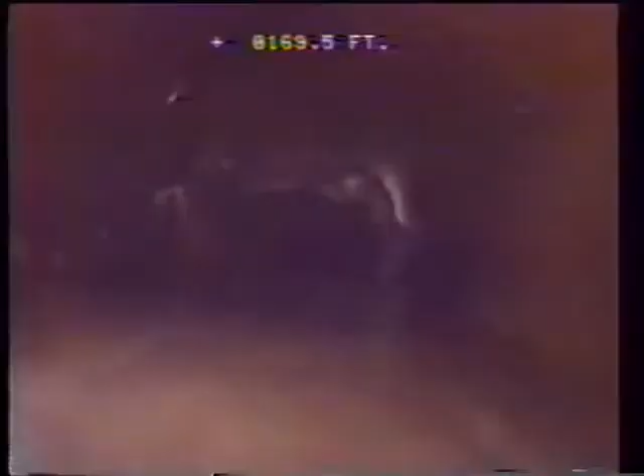Television has been growing in popularity as a means of investigating the condition of all types of buried sewer lines. As an investigative tool, it is unmatched. The advent of television inspection has enabled operators to pinpoint structural damage, corrosion, leaking joints, root penetration, illegal connections, and other problems often seen in older lines.

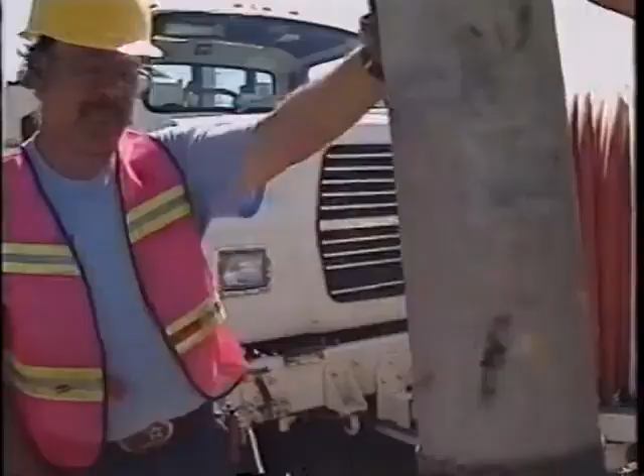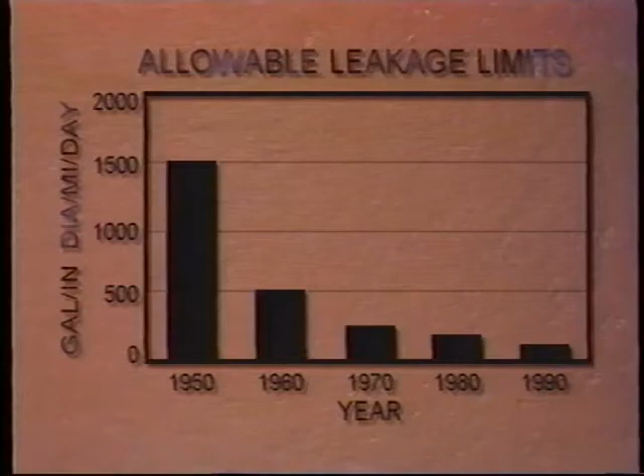Maintenance and rehabilitation of older systems has been made possible through the use of televised inspection. And as the older lines are brought up to today's standards, much of the credit is due to underground television surveys and to the fine work of the crews that do the evaluation.

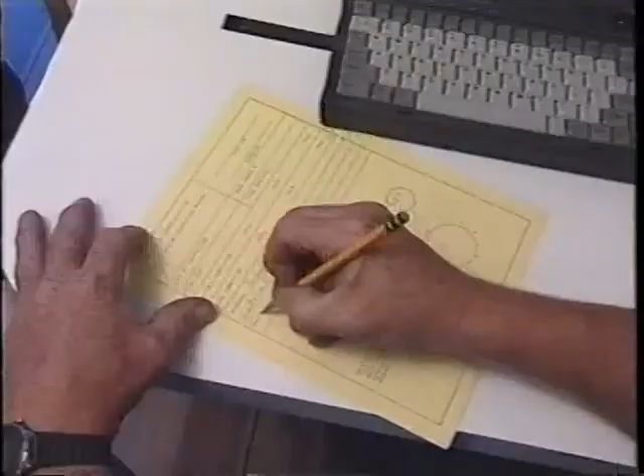More recently, however, a number of agencies are using television as a means of determining the acceptability of newly constructed lines. Opinions regarding structural damage are, in many instances, made erroneously. Operators of television equipment are looking for problems. This is the nature of their job.

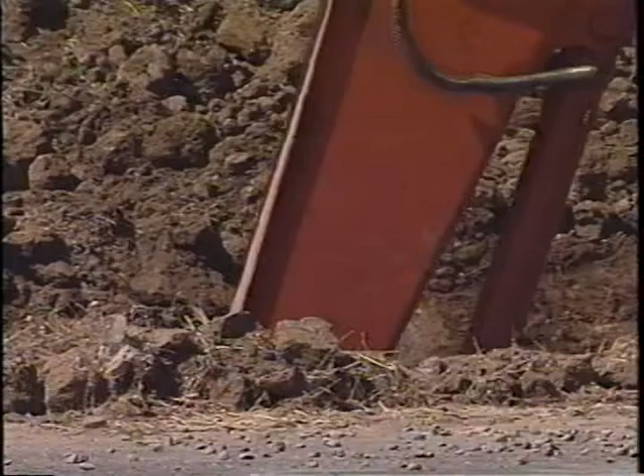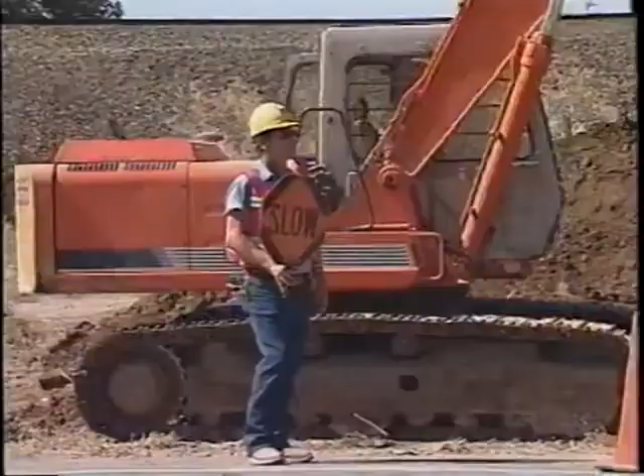However, there have been many instances where dig-ups have shown the problem described in the log to be either non-existent or of a significantly less magnitude than originally indicated. Unfortunately, when entered into the operator's log, these unintentional errors of judgment have frequently led to conclusions which become difficult to resolve. This practice has resulted in delay, extra cost, confusion, and in some cases, legal action.

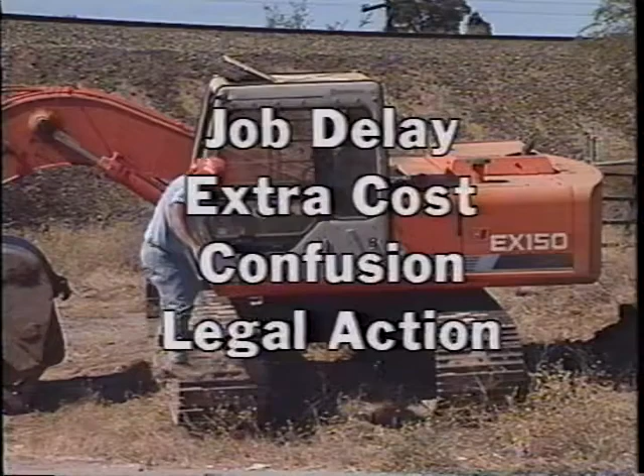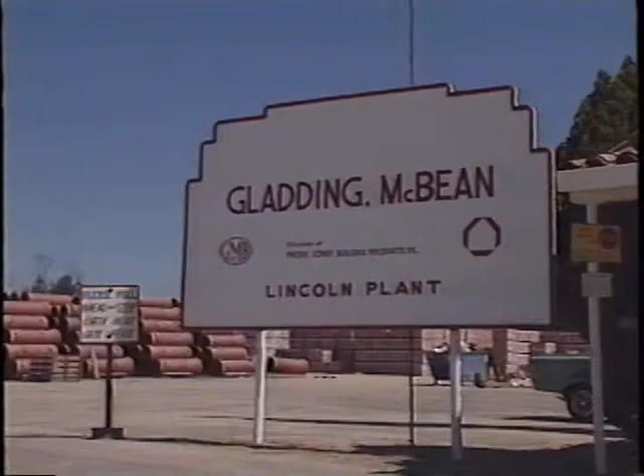To prevent unnecessary expense, delay, and possible litigation, the National Clay Pipe Institute and the National Association of Sewer Service Companies agreed to co-sponsor a project to explore these problems in greater detail. Recognizing the educational benefit that would come from the study, the CUES Corporation also agreed to participate. The evaluation would be done at the clay pipe manufacturing facility of Gladding McBean, located in Lincoln, California.

The goal of the project is to demonstrate and identify several factory and field conditions which can be erroneously interpreted during televised video inspection and assessment of new sewer lines. It is by no means all-inclusive, as many other conditions may be found in a sewer. The following three areas will be covered: 1. Sags in line. 2. Seeing is believing. Or is it? 3. Perceived defects.

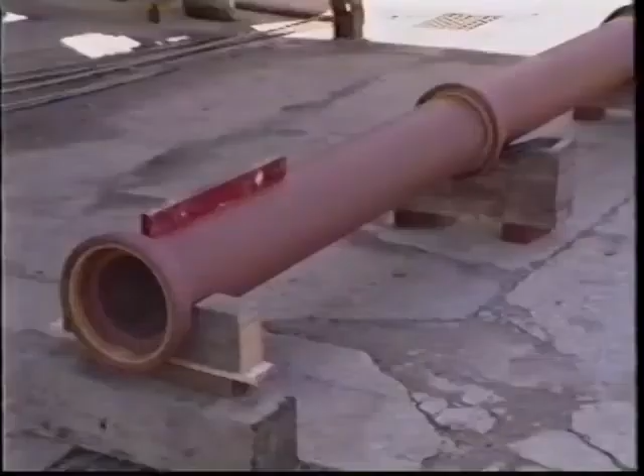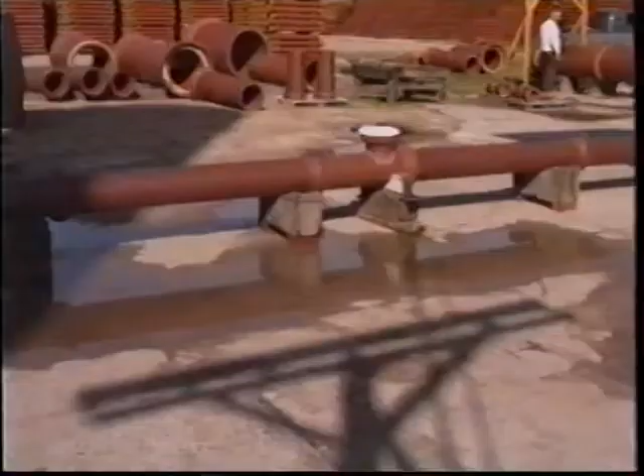Sags in line. The first test shows a simulated sag in an 8-inch clay pipeline. Although the amount of sag permitted in a pipeline is not specified in ASTM, it is common knowledge that all pipelines experience some settlement under load, and it is due to the pipe bedding rather than the pipe itself.

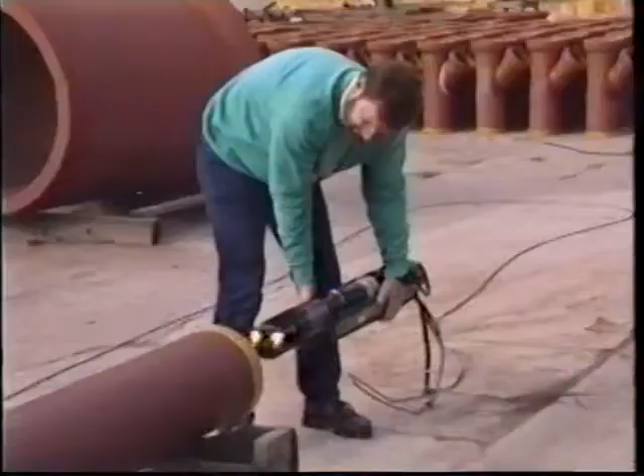It should also be noted that a televised inspection made shortly after a water exfiltration test can have the appearance of a sag due to the standing water, which may take a long time to drain from the line. This is especially true in a line with a very flat grade. Such lines have been erroneously declared to be leaking by an inexperienced operator.

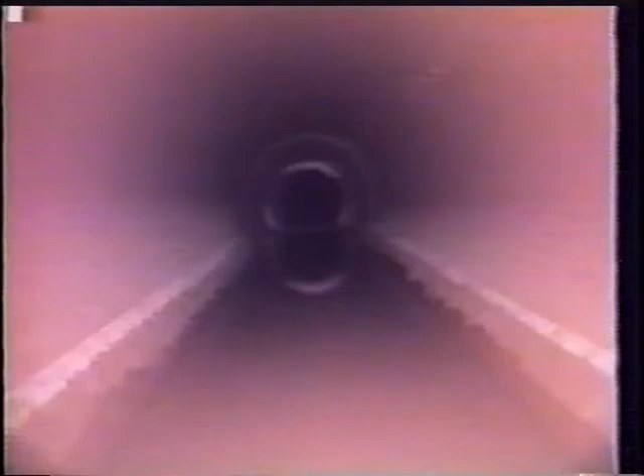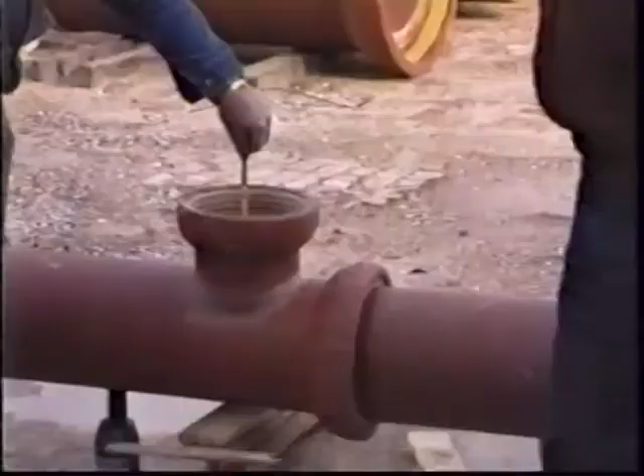Estimating the depth of water is very difficult. Can you estimate the depth of water in this pipe? Visually, there is no point of dimensional reference other than the pipe itself. Our measurement indicates the water depth to be 1 1/2 inches.

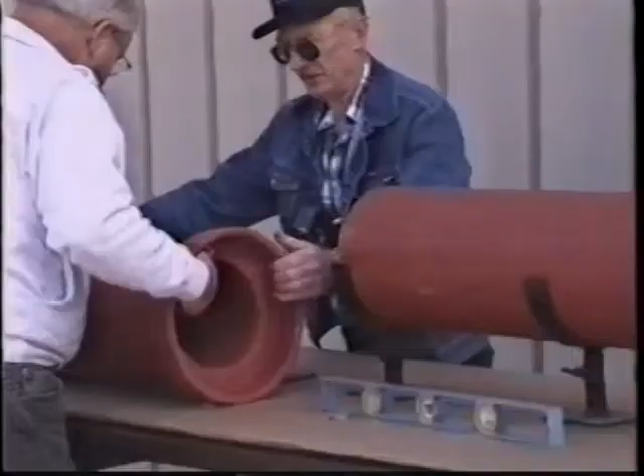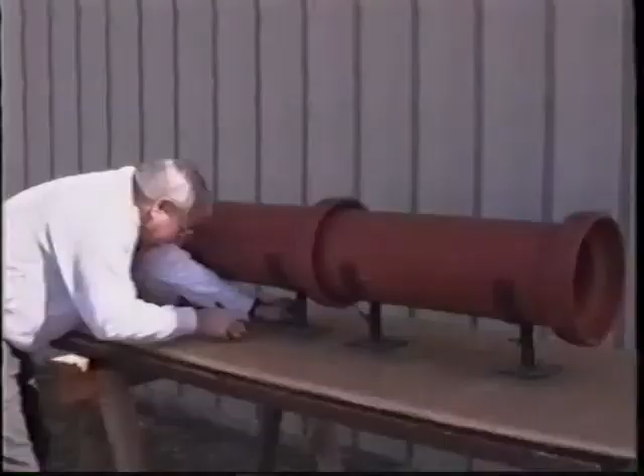Seeing is believing. Or is it? The next part of the evaluation was done in 2 short lengths of 8-inch vitrified clay pipe. The shorter lengths were selected for ease of setup and adjustment. The pipe were without gaskets of any kind to enable maximum joint movement.

A frequently observed field observation is sometimes referred to as a halo. It was believed to be caused by the camera light reflecting off the pipe, especially at the joint. This reflected light tends to exaggerate and distort the resulting image. Let's listen to an operator's comments.

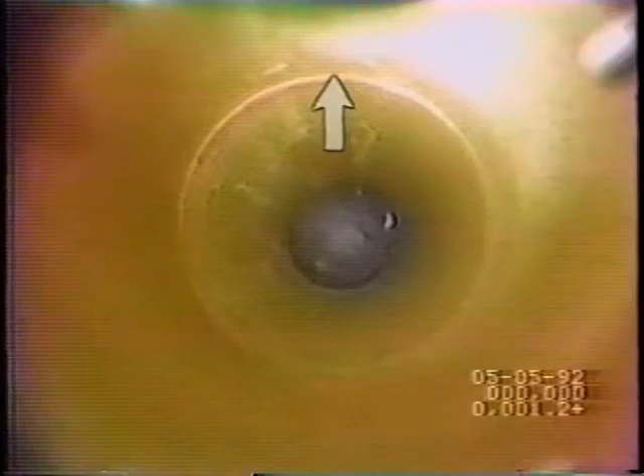What you're now viewing is a 1/4 inch. The upstream section of pipe has been raised a 1/4 of an inch higher than the downstream section. As we turn the iris up, you can see the top of the pipe. The offset that you would see would be in quadrant 3, which is the top of the pipe. You would not see anything on the bottom when the upstream section is raised.

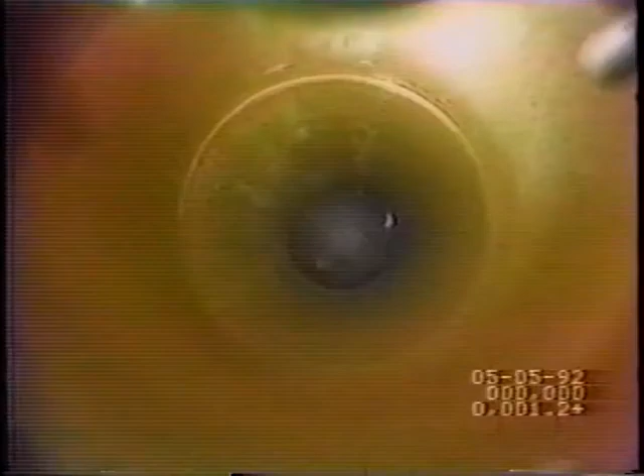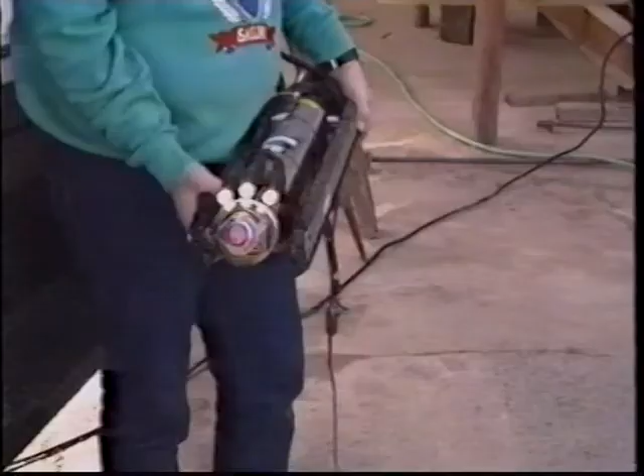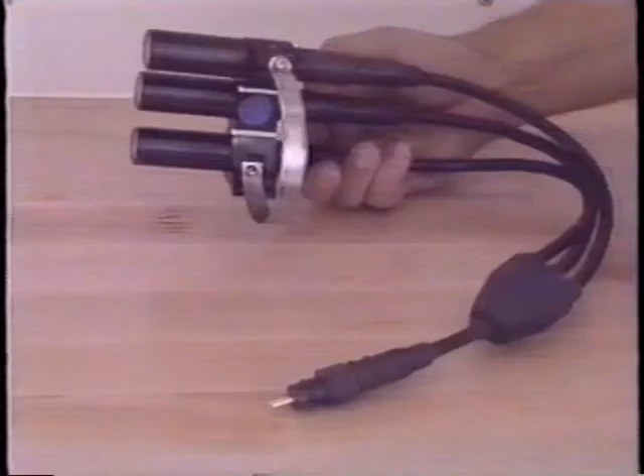The camera used by CUES at the Lincoln tests was a current model, which had automatic light and lens adjustment capability. This time, when the operator attempted to increase the light intensity, the camera lens simply compensated for every light adjustment. Unable to reproduce an often observed field condition, the CUES engineer was asked to disarm the automatic light compensating feature and go to a fixed light system. When these modifications were made, the condition observed in the field was immediately duplicated in the test setup.

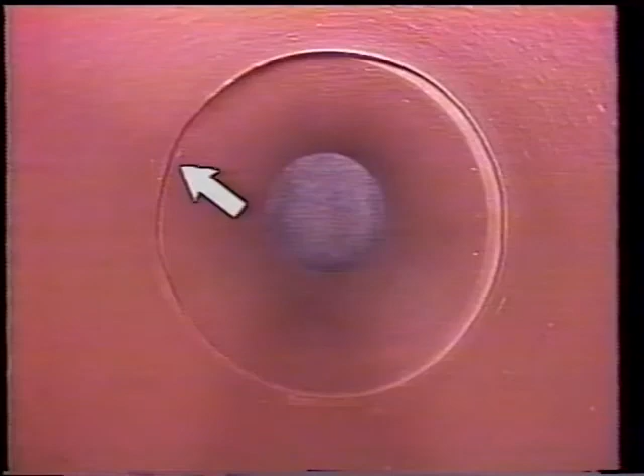Using both the auto and fixed light arrangement, a series of tests were made in several conditions. Straight alignment. This is the joint in straight alignment. With the camera set at a slight angle relative to the center line of the pipe, notice the appearance of the left side of the pipe. This is due to the slight taper, which is a result of factory trimming before the pipe is fired. The other side also has a taper, and although it is only slightly smaller, it is not accentuated by the camera.

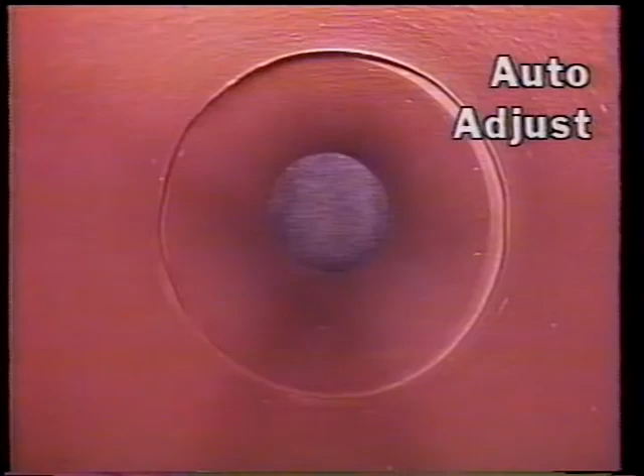Here is the same pipe with normal light and the joint taken apart. Notice as the light changes, the taper becomes less visible. With the camera placed back in the pipe, notice the difference between the auto-adjust light and the fixed light.

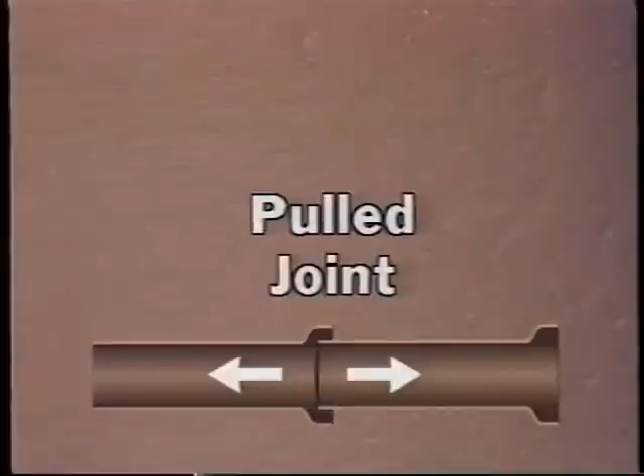Pulled joint. The next tests were of a pulled joint, which is sometimes called a gap between the ends of the pipe in straight alignment. Gaps of 1/16, 1/8, 1/4, and 3/8 of an inch were simulated between the pipe ends to create the gap.

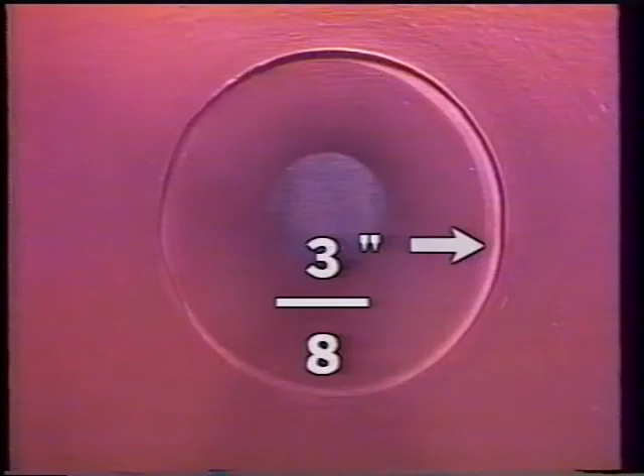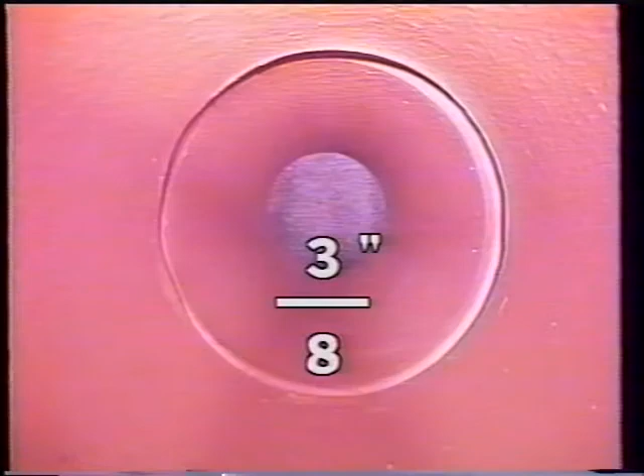Notice that the full circumference is visible, which is an indication of a pulled joint. With the gap set at 3/8 of an inch, notice the change in appearance when the intensity of the light is increased. Keep in mind that the pipe is still in straight alignment and there is no offset.

The clue to determining whether it is a gap or an offset can be found by looking at the joint. A gap should appear uniform around the pipe, but an offset will be crescent-shaped. The position of the lights can change the appearance, making interpretation difficult at times.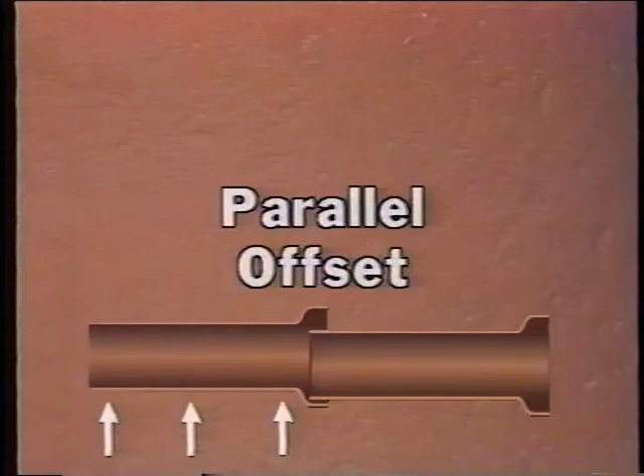Parallel offset. The next series is a parallel offset joint. By the use of pipe supports and shims of varying thicknesses, offsets of 1/16, 1/8, and 1/4 of an inch could be simulated.

When one pipe is displaced in a parallel manner in the amount of 1/4 of an inch, the joint looks like this. Notice the distortion when the light intensity is increased. Doesn't this offset look more than 1/4 of an inch?

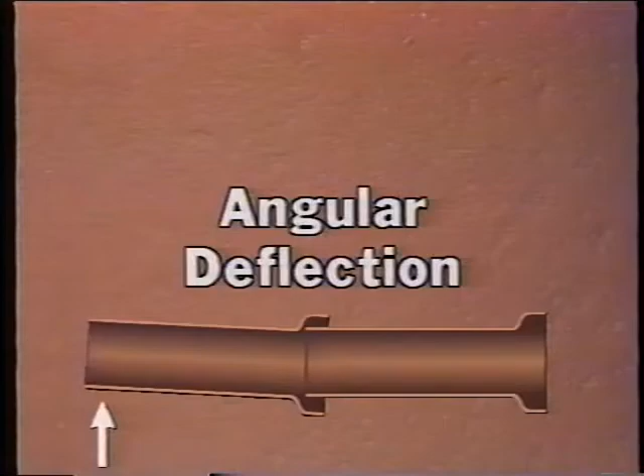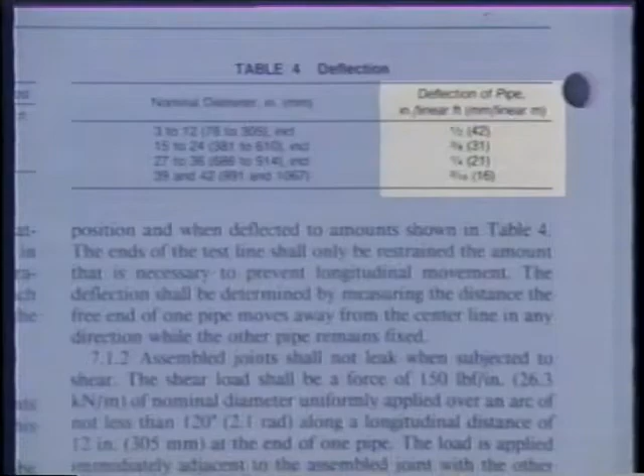Angular deflection. The next series is angular deflection. ASTM standards require clay pipe joints to seal in angular deflection up to a maximum of 1/2 inch per foot of length, depending on the pipe diameter.

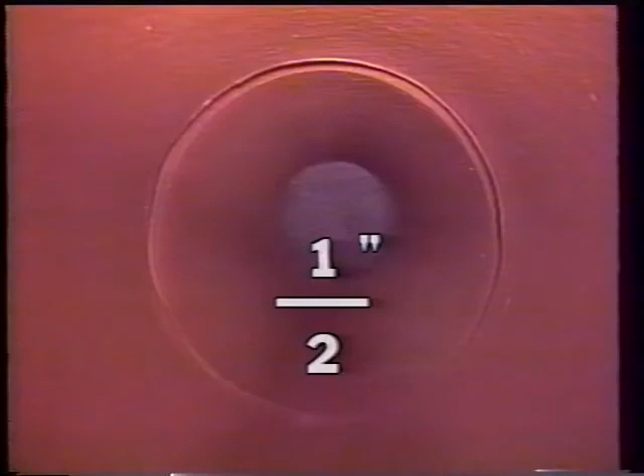Although harmless in the normal operation of the sewer, the edge of the pipe can appear as a gap, and it could be noted as such by the operator. Although there may be a gap on one side due to the angular deflection of the pipe, the other side of the pipe is completely tight, as demonstrated by rotating the pan and tilt camera around both sides of the joint.

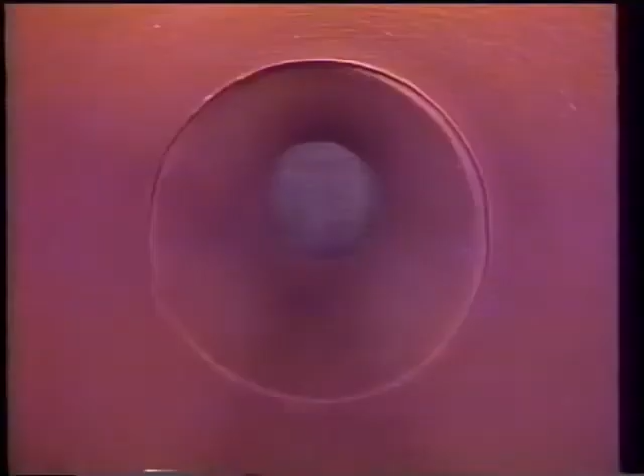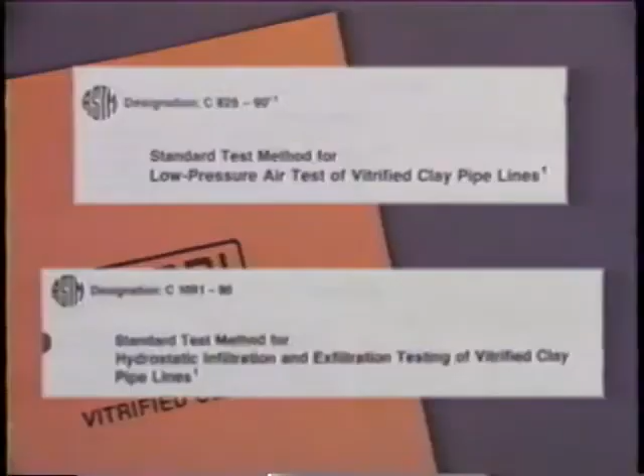The following view with normal and high light intensity is well within the sealing range of factory-applied joints and the allowable limits of the ASTM standards. In fact, there is nothing improper about this condition, and if the line otherwise meets a pressurized air or water test, it is completely acceptable.

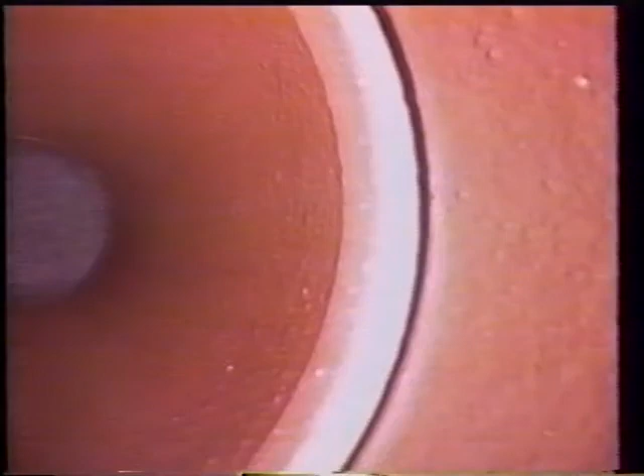Perceived defects. With the camera still looking at the joint in angular deflection, we will increase the light intensity. Notice that the two areas merge together to give the appearance of the end of the pipe. As the camera moves in for a closer view, it becomes obvious that there is a tapered surface on the inside of the barrel that is reflecting light and contributing to the visual distortion.

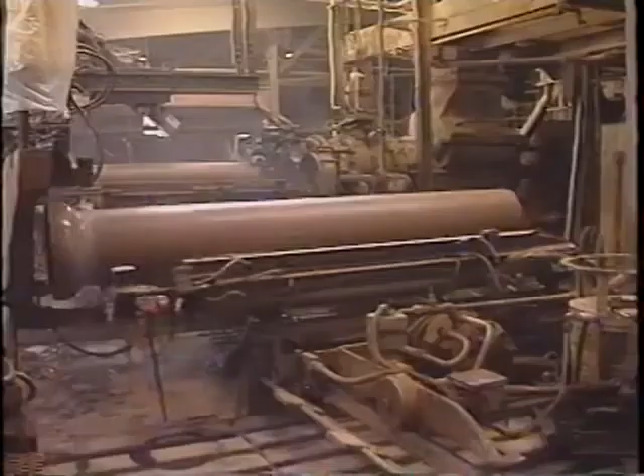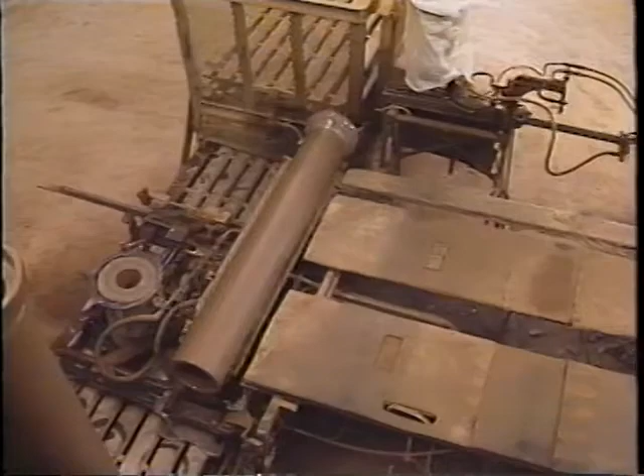To understand this condition, it is necessary to look at the manufacture of clay pipe in some detail. Following extrusion, the ends of the pipe are cut to length and trimmed to remove excess material. End finishing is done with sharp rotating knives that produce a very slight taper on the inside edges of the barrel at each end of the pipe.

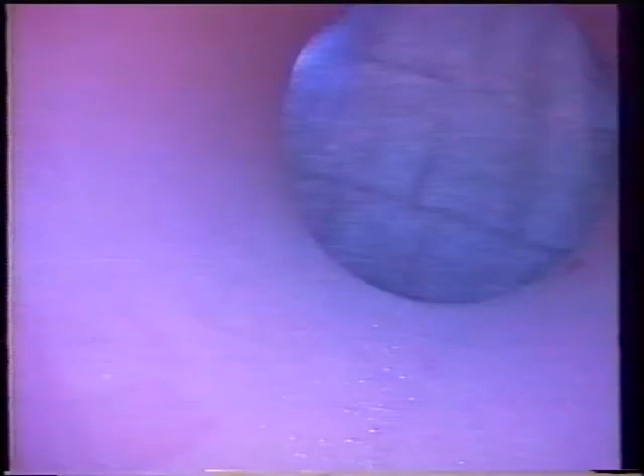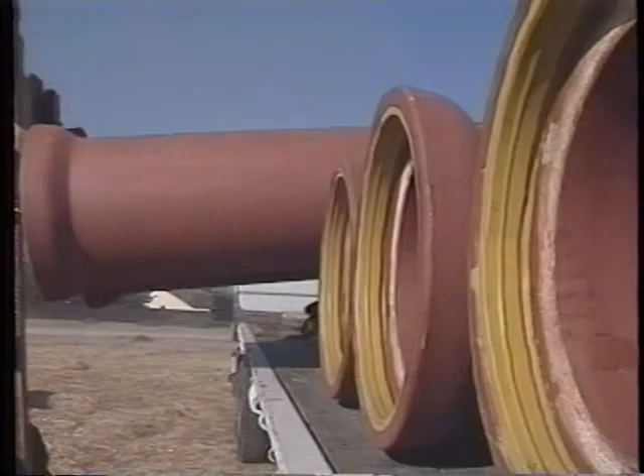These tapered areas are almost invisible to the naked eye, but when the light is reflected off the surface and the camera is in the right position, the taper can appear to be a gap or an offset joint. There are other conditions which can be misinterpreted. Manufacturing marks, surface scrapes, and forklift marks can give the appearance of cracks or fractures to the untrained inspector and can lead to erroneous and costly interpretations.

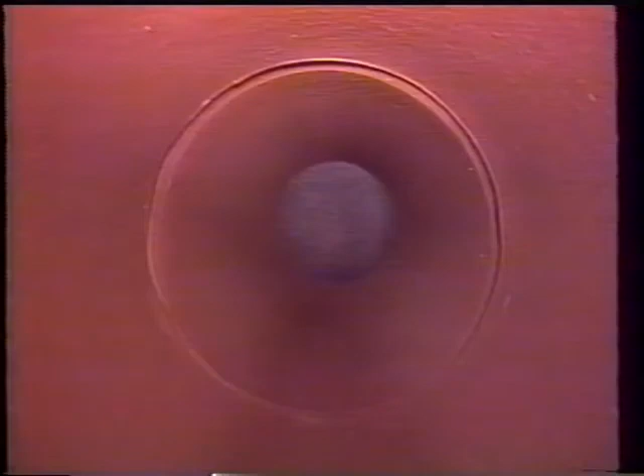Summary. 1. The image as seen by the eye of the camera can be distorted. The appearance of an offset joint is exaggerated by any gap between pipe ends and the angle of the joint itself. 2. The camera angle increases the distortion.

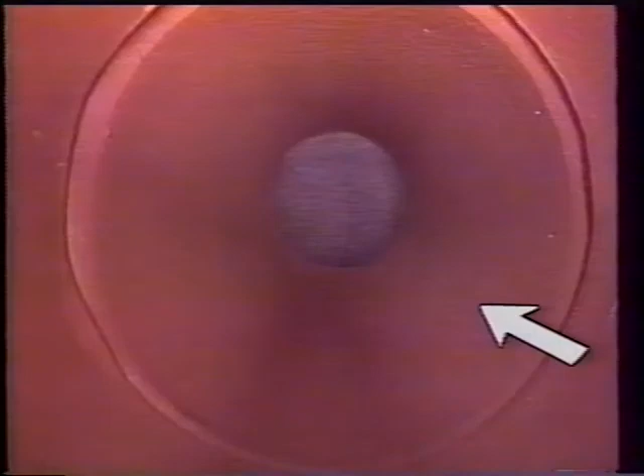A camera that is not centered in the pipe will allow the camera eye to look into a joint rather than along the interior pipe surface. This distorts the operator's perspective and consequently the interpretation. 3. The specific dimension of an offset, a joint gap, or the depth of water is limited in accuracy.

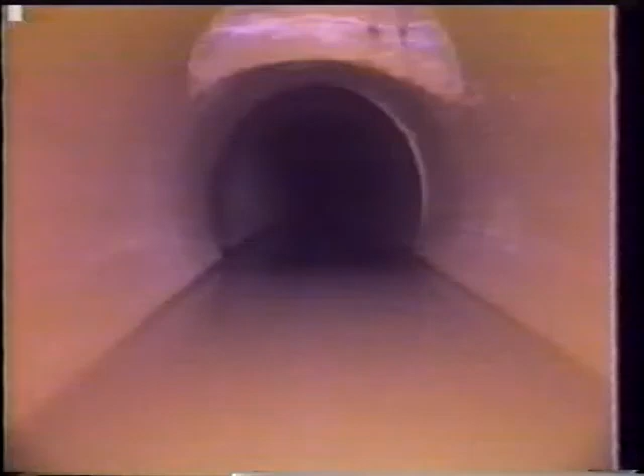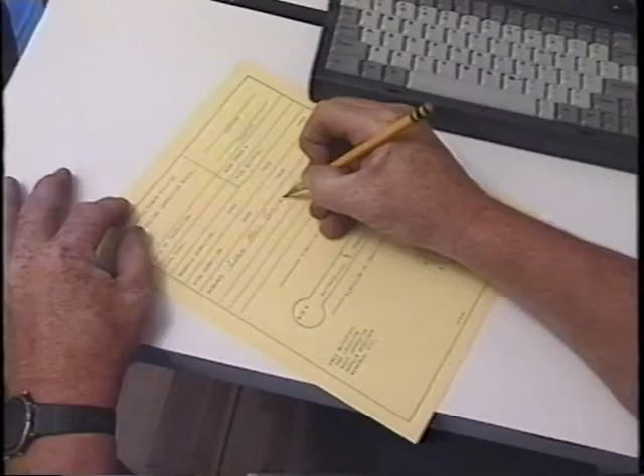4. The operator's log is frequently interpreted as being much more accurate than the operator intended. 5. Manufacturing and handling marks can appear to be serious defects. The brightness of the light will influence and distort the visual image.

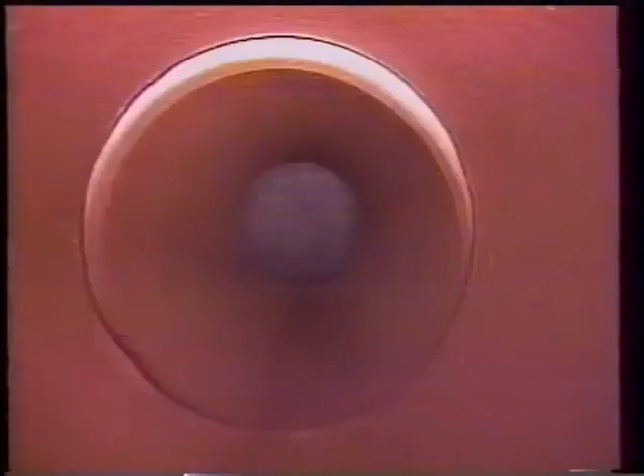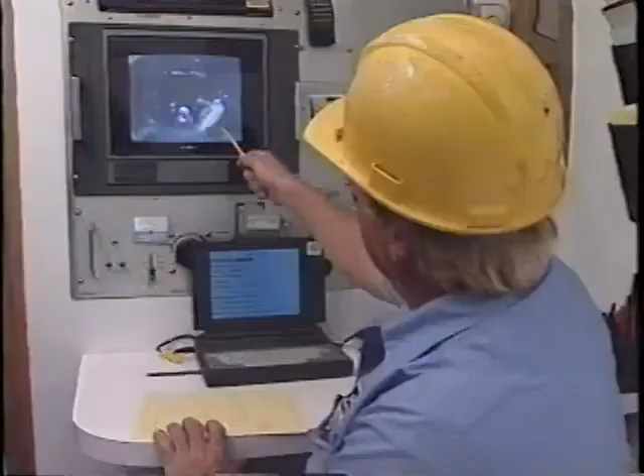As we once again look at the exaggerated reflection off the tapered edge of this pipe, we are reminded that as an acceptance test, the interpretation of television inspection has not reached the level of reliability or accuracy demonstrated by established ASTM acceptance tests. Television inspection is a good tool. Let's not ruin its effectiveness by exceeding its capabilities. Simply stated, you've got to know your limitations.